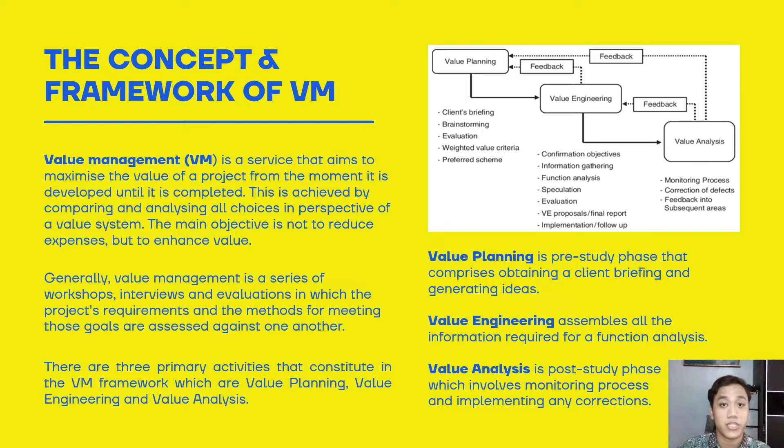Executive summary. There are three proposals in this assignment. The first proposal is construction of a double story bungalow for a rest house. The second proposal is construction of a recreational building for a gym. And the last proposal is construction of an educational, cultural, scientific building for a mini library. Let's look at the next one.

Timeline for value management study. There are three phases in this value management workshop. The first phase is the pre-study phase, the second one is the study phase, and the last one is the post-study phase. The pre-study phase will be conducted 2 days before the study phase. Preliminary understanding will be established. The client will appoint the value management team, and the relevant information will be provided from the design team to the value management team.

The next one is the study phase. The duration of the study phase will be 5 days. The information phase, creativity review phase, evaluation phase, development phase, and presentation phase will be carried out accordingly. And the last phase is the post-study phase, which will be conducted 2 days after the study phase. In this phase, the feedback phase will be conducted. Corrective action and follow-up will also be carried out.

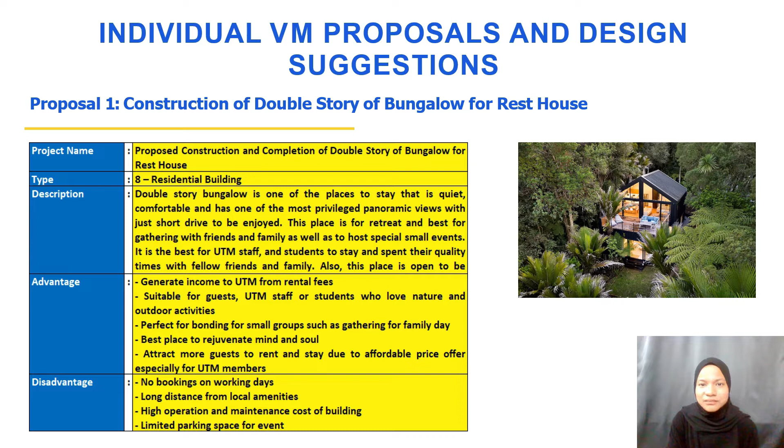This is proposal number 2. It is construction of a gym, a recreation building for strength and personal training, inclusive with plenty of training equipment, able to attract men and women to use the facilities. Exercise with a panoramic view and stars in the sky, but it has high installation and maintenance cost of equipment and also high operation and maintenance cost of the building.

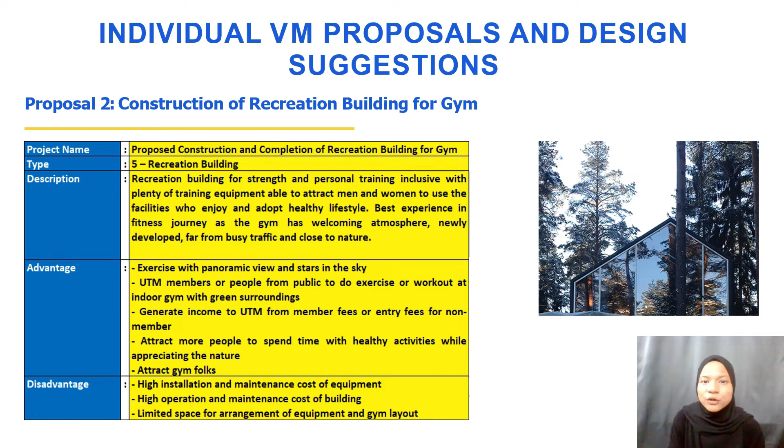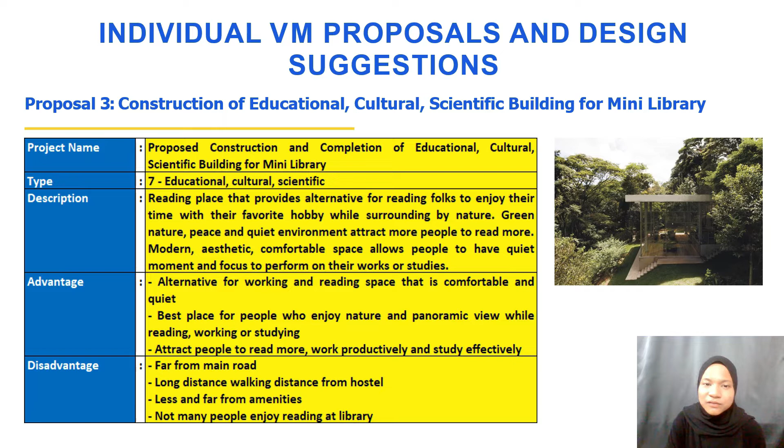Proposal number 3 is the construction of an educational, cultural, scientific building for a mini library. It is a modern, aesthetic, comfortable space that allows people to have a quiet moment and focus on their work or studies. It could attract people to read more, work productively, and study effectively, but not many people enjoy reading at the library.

Moving on to project description, it describes the information about the project required by the client. The location is at UTM Observatory and the proposed development type is commercial development. Target users are public, especially UTM members. The main objective is to generate sufficient income to UTM through revenue generated.

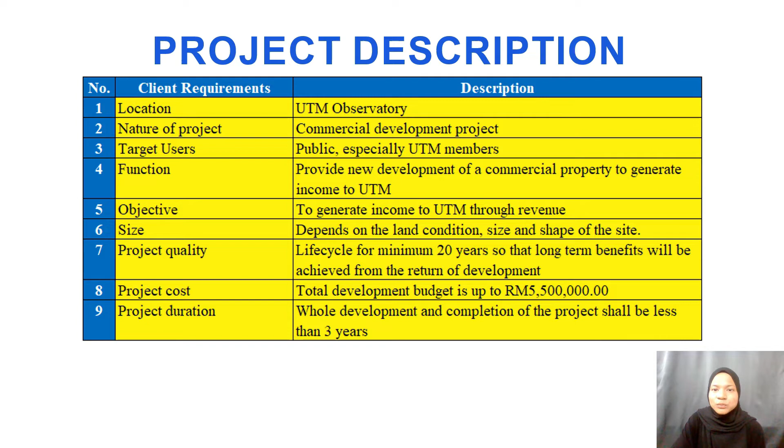The life cycle of the proposed project is minimum 20 years and the budget provided is 5.5 million ringgit. The client expects the whole completion of the project is not more than 3 years. Other than describing the project information, design and the proposed development and the site location shall be reviewed.

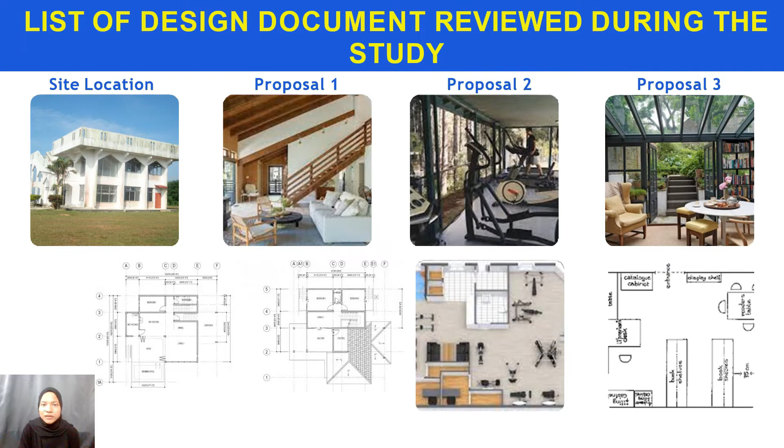These are the photos of the site location and designs as well as layout of the proposed development reviewed during the workshop. For the elemental cost estimate analysis, for each of the proposal is summarized in a pie chart.

For the first proposal, the three highest percentage of element is superstructure 32.5%, external work 23.1%, and services 14.5%.

While for the proposal number 2, the three highest element is superstructure, which is 36.7%, services 29.4%, and substructure 19.8%.

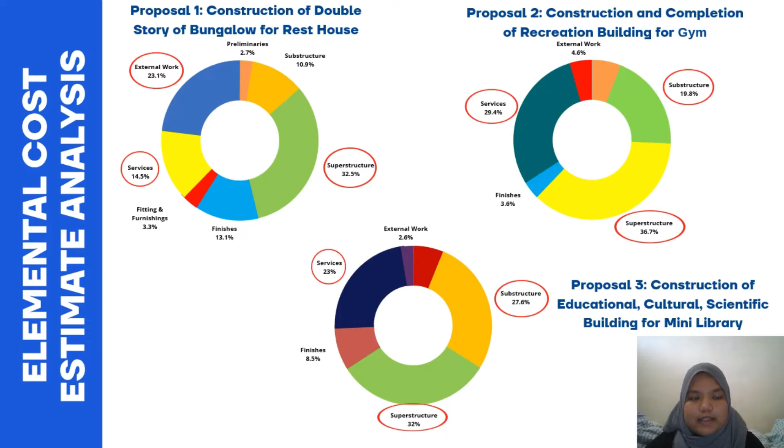While for the third proposal, the three highest element is superstructure 32%, substructure 27.6%, and services 23%. For functional analysis of element, there are two sections, which is the cost of significant item and the function of significant element.

Our group resides with proposal number 1, which is constructing double-story bungalow for rest house. The highest element of this proposal is superstructure, which is 32.5%.

There are several reasons for this particular element. The first one, it is intended to fulfill its purpose and maximize its function. It increases the level of comfort. It keeps the development run smoothly. It guarantees visitor safety, and it contributes aesthetic form.

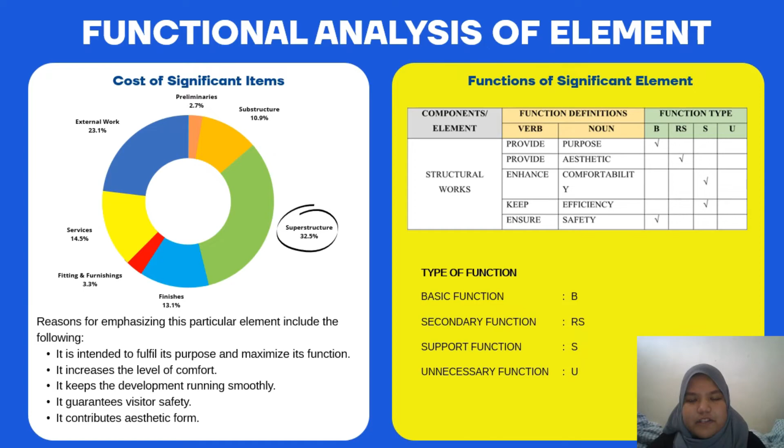As for the function of significant element, there are two basic functions, which is provide the purpose and ensure the safety, while the secondary function is to provide aesthetic, and the last function is to support the function, which is enhancing comfortability and keep efficiency. My name is Suchi and I will now continue for the function analysis form.

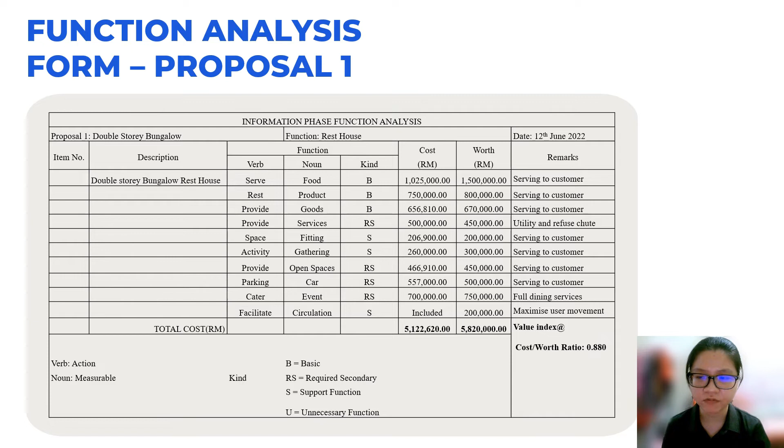For the first proposal, which is the double-story bungalow rest house, the cost-worth value obtained is 0.880 after analyzing all the functions by using the function analysis form.

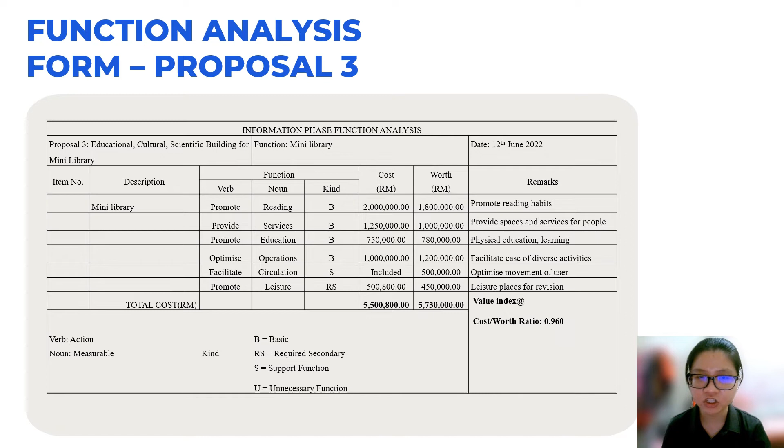And for the third proposal, which is the mini library, the cost-worth value obtained is 0.960 after analyzing all the functions of the mini library by using the function analysis form.

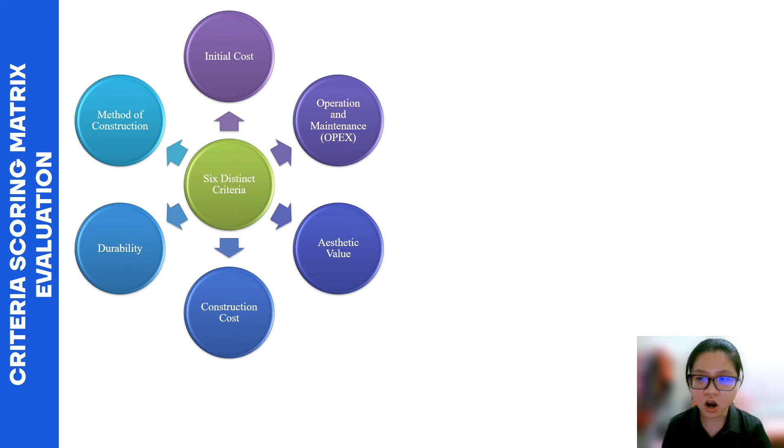After undergoing the function analysis form evaluation, the proposed proposal also undergoes the criteria scoring matrix evaluation. The criteria scoring matrix consists of 6 distinct criteria, which are the initial cost, operation and maintenance, aesthetical value, construction time, durability, and method of construction.

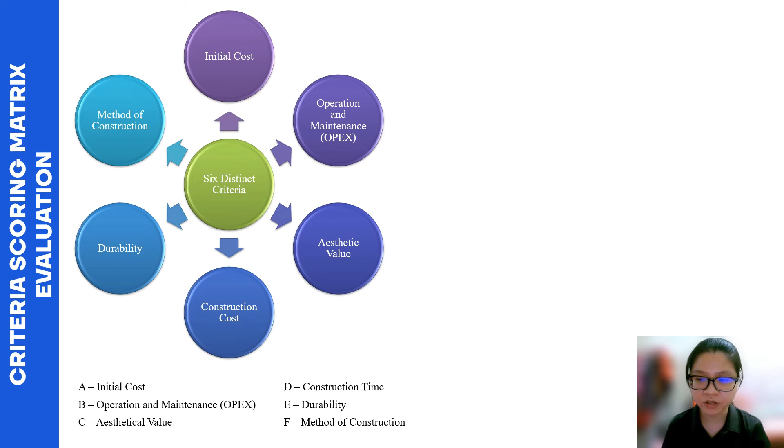After that, the criteria scoring matrix has been identified and the assigned weight of the evaluation for each criteria has been produced. Then, the criteria scoring matrix evaluation has been done for every proposal, and at last, the proposals that ranked in first and second places have been selected to undergo the life cycle costing analysis.

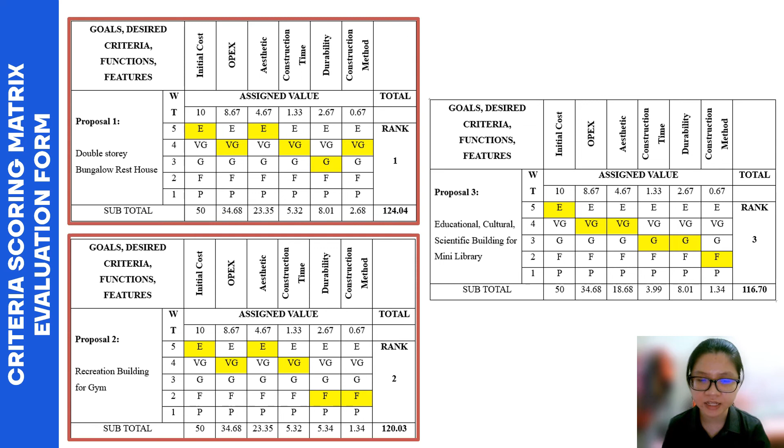After conducting the life cycle costing analysis for proposal 1 and 2, the net present value and the internal rate of return for proposal 1, which is the double-story bungalow rest house, is higher. Thus, this proposal has been selected as our proposal project to construct nearby the observatory tower in UTM.

Overall, the whole process has undergone the value management study process. The first stage is the pre-workshop, which primarily focuses on establishing a fundamental understanding and adequate applicable information for all parties involved. An orientation meeting was conducted with everyone engaged a chance to learn more about value management.

The customer would then nominate the value management team coordinator as the first stage, and the second stage is the workshop, which was conducted between 12 June until 16 June of 2022.

Throughout the workshop stage, the value management team have undergone 5 phases, which are the information phase, creative phase, evaluation phase, development phase, and the presentation phase. And the last stage is the post-study phase.

After the workshop phase, in order to fully utilize the advantages offered by the value management, there are a few crucial post-study tasks that must be completed. The post-study phase can be further broken down into the phases of report creation and evaluation, implementation, and follow-up.

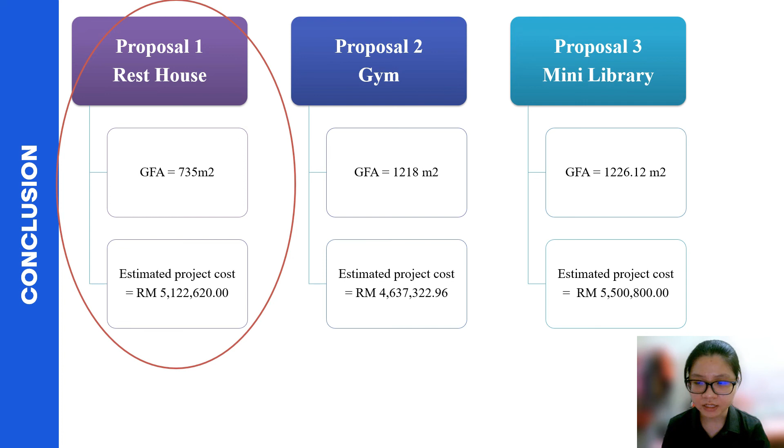In conclusion, among the 3 proposals that have been proposed, proposal 1, constructing a double-story bungalow rest house, has been chosen with a total GFA of 735 meters square and the estimated project cost of 5,122,620 ringgit Malaysia, and the estimated cost also did not exceed the client's budget of 5.5 million. That's all from us.